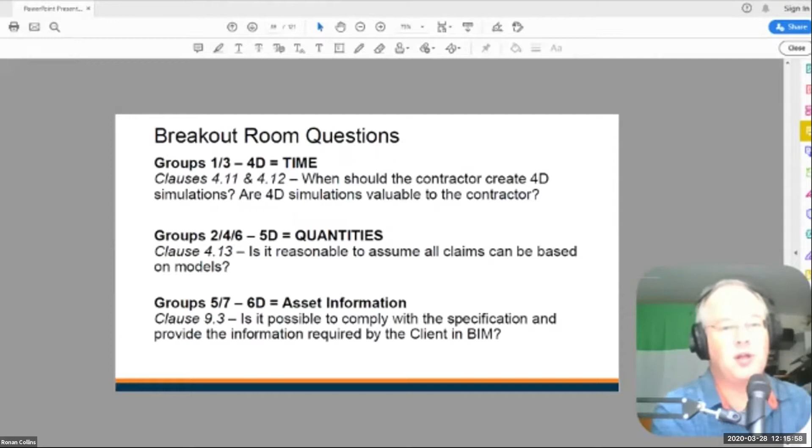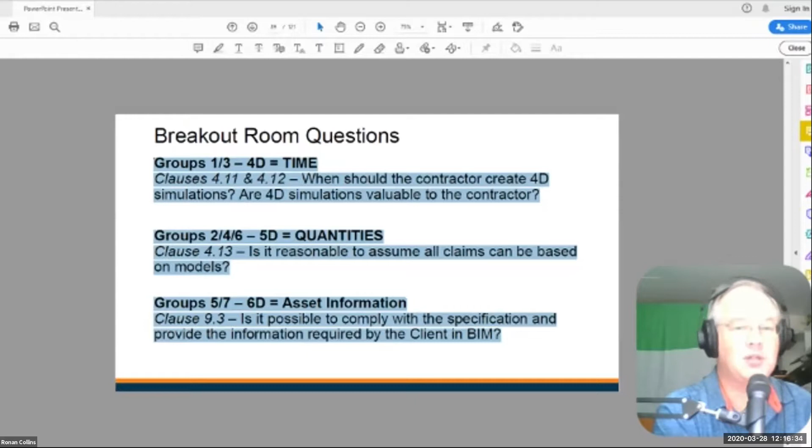If you're in groups 1 and 3, look at the PDF, specifically the 4D clauses. Clause 4.11 and 4.12 refer to 4D, which is the link between time and the model—the construction schedule and the model. Have a look at the actual clauses and report back what you think: when should the contractor create these simulations, and are these simulations valuable to the contractor?

They may be required by the client, but do they have any value to the contractor, yes or no? If you're in groups 2, 4, or 6—the even numbers—have a look at clause 4.13, just that one clause, to do with quantification. Is it reasonable to assume that all claims can be based on models? Have a discussion and see if there's enough information in the models to make claims for progress payments.

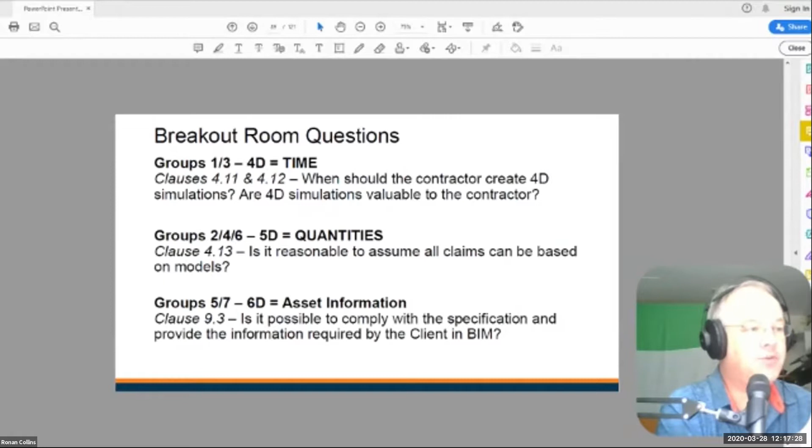And the last two groups, 5 and 7, look at clause 9.3, the asset information clause, and determine whether you think it's possible for a contractor to comply with the specification and provide the information required by the client in BIM, and let us know your comments.

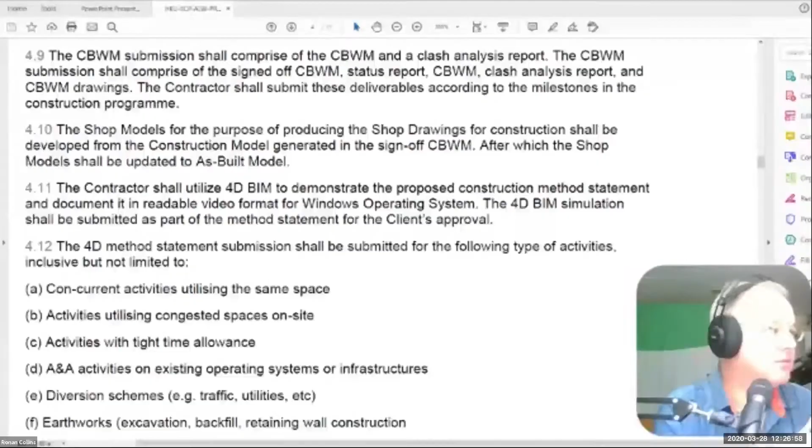Room 1, your question was when should the contractor create 4D and is it valuable to contractors? Can we have a representative from room 1? Hello, this is Kit from group 1. Our group thinks 4D will be helpful for contractors, especially assuming this document is for the main contractors, because 4D mainly concerns time. Applying this can help in the planning stage to get all trades together, as well as in the construction stage, helping with project monitoring. But we're also concerned about the capability of the subcontractors or the contractor itself—whether they have enough training or technology to really run this, or would it be too heavy a burden to initiate this 4D model for them?

Do you think the wording is reasonable, that the client's asking for too much or the right amount? We're not quite sure if this is too much, but we think it might be helpful for them before site possession, to have the model pre-construction.

So group 3 had the same question, can we get a representative from group 3 to see if they picked up anything different? Our group thinks the 4D modeling should happen before the final design was developed. Yes, 100% agreed. And for the second question, it's not only good for the contractors, but also helps all the planners and project team achieve efficient planning of construction work. Okay, great, thank you for that.

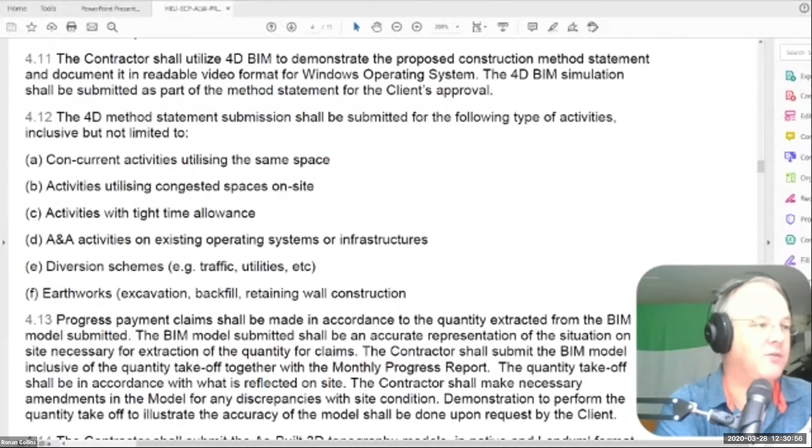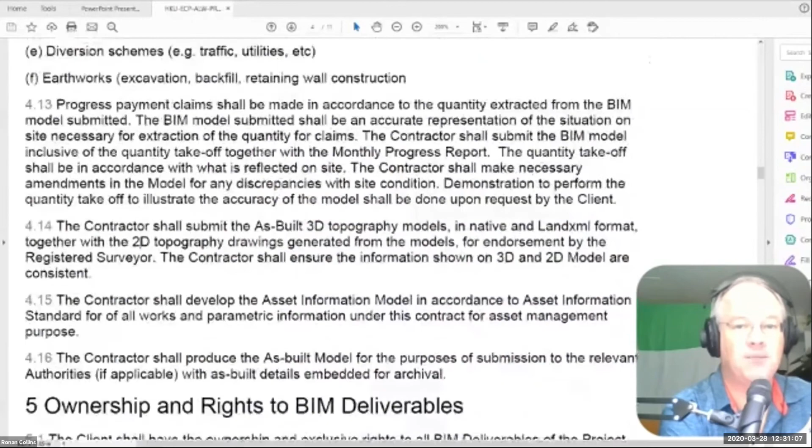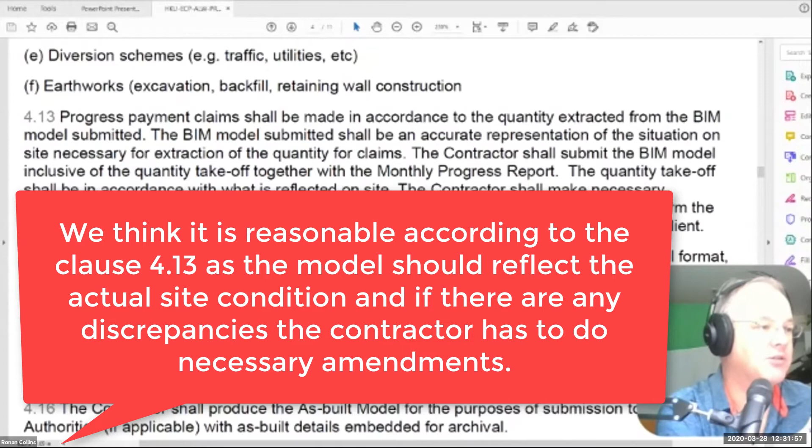Okay, so we're going to go to the next question on quantification. So can we get group 2 to report back? So I'll show you the clause 4.13. So who's from group 2? Okay, so the comment has gone back from Xiyuan. I don't know if that's the right pronunciation. I apologize. We think it's reasonable, according to the clause, as the model should reflect the actual site condition. And if there are any discrepancies, the contractor has to do necessary amendments. Okay, so you think it's reasonable, right?

Let's find out, what does the team from room 4 think? Can we get a representative from room 4? We did kind of think it's reasonable as well, with the same reason as group 2, because it should reflect the site. But then we do have a question, because if they're getting claims, then something has already happened at the site, right? So that should be cross-referenced as well at the same time. Yeah, you need to be able to identify variations from the original contract. Okay, you guys think it's reasonable?

Okay. And group 6, can we get a comment from group 6 in terms of is the clause reasonable in terms of quantification? Tiffany? Hi, the clause, it's reasonable given that it's fulfilled, which I think in reality, it wouldn't run so smoothly on site. What do you mean it won't run smoothly in reality? As in, it all sounds a little bit too good with the monthly progress report and sounds too good. Yes, I agree, it sounds way too good.

Yeah, because usually sites are a lot more chaotic with changes, and what's built is not matching to the shop drawings and so on. There's a lot more chaos. That never happened on a construction site. What are you talking about? They're not matching to requirements and so on.

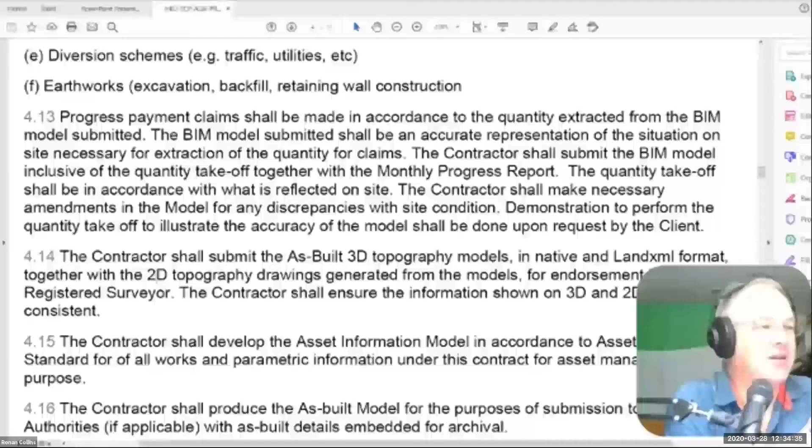Okay, so let me explain why this clause is not reasonable, because I can understand where you're coming from, but let me explain why this clause is not reasonable from a technology perspective. So what the clause is saying is that progress payment claims shall be made in accordance with the quantity extracted from BIM. So in other words, if you read that from a legal perspective, you can only claim for quantities extracted from BIM. And the reality is, in any model that anybody's ever created, only 60 to 70% of the building can be measured from BIM.

So for example, we don't model trims or finishes in Revit typically. So a simple thing like a skirting board will not be in Revit. So if it's not modeled, it can't be quantified.

So this clause is unreasonable in that the expectation is that everything ends up in the model, and it's not actually plausible because it would take too much time to model stuff to get measured. So that's the first problem. The model should be submitted as an accurate representation of situation on site for extraction of quantities. That's nearly impossible to achieve.

The problem is that the guys who are building the models are not typically on site. So how on earth are they going to make sure that their model reflects what's happening on site? And things are happening on site on an hourly basis. So how on earth do you make sure that you're up to speed? Now, if it's concrete quantities and you're building a concrete superstructure, then you've got some chance.

But if it's something like a mechanical fit out for fire sprinkler pipes and electrical fit out for cable trays, et cetera, you have no way of figuring out how it's all been tagged on site. So making sure that the model is an accurate representation of the situation on site is next to impossible. And then the contractor shall submit the model inclusive of the quantity takeoff together with the monthly report. That's fair enough. The quantity takeoff shall be in accordance with what's reflected on site.

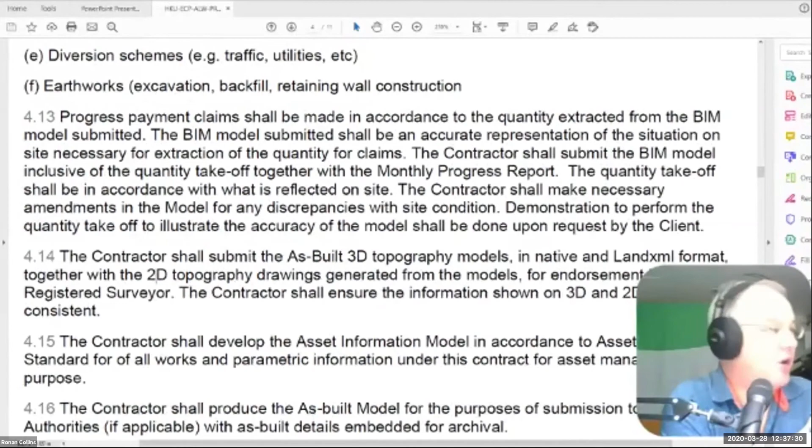Okay, so we got 2 more rooms to go. Is it possible to comply with clause 9.3? What did group 5 think? We think that it is not entirely possible. It's not entirely possible. Okay, so now you're sitting between fences. Okay. Because it needs the consultant, subcontractor, and even the supplier's input. Yep. To produce a model that is competent for facility management. Yeah. Okay. So how would you go about solving the problem if it's not entirely plausible? How would you actually get a definition of what is possible?

Only highlight the information that the contractor is, or it can be produced, such as shop drawing. Yep. The O&M manual. Yep. Yeah. Okay. Cool. Yeah, that's about right. So if you use the O&M manual as a guideline, that's a pretty good way of doing it.

Okay, can we hear from group 7? What did you think, is it possible to comply with the specification in clause 9.3? Yes, it's Jimmy from group 7. Hey, Jimmy. And we think for those information mentioned in clause 9.3, it is possible to comply with that, because from 9.5 you can see some quite traditional information provided by the contractors to the asset management team, like O&M manual, shop drawing, detail drawing, even some material properties.